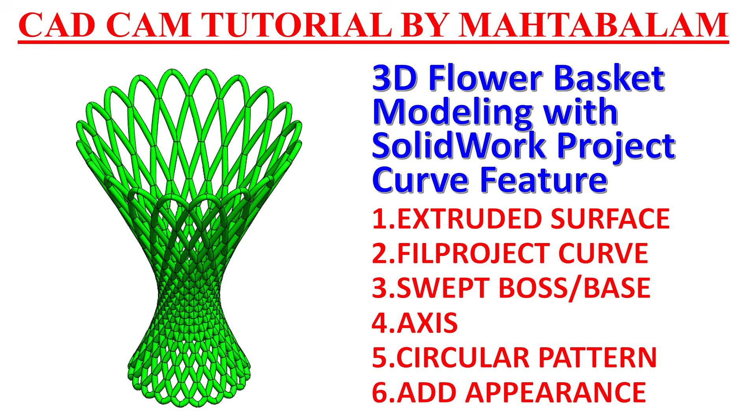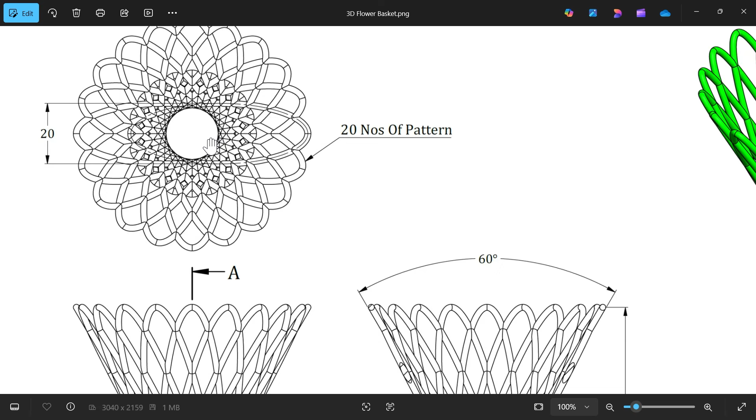Let's make a 3D flower basket in SolidWorks with the help of the project curve feature. Now you will see this is a front view, this is a section view, and there is one top view. In the top view you will see this is the outer side, and there is an inner side also visible. Now you will see there are 20 patterns. You will see this one pattern is highlighted here.

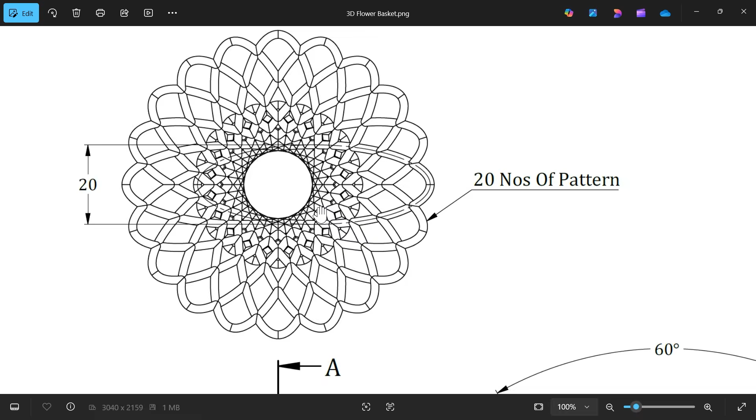This is a kind of ellipse. The width is 20 millimeter. See, this starts from the top and goes to the bottom. You will see one construction line. Okay. Now if we see the side view, the total length is 100 millimeter and the bottom diameter is 40 millimeter.

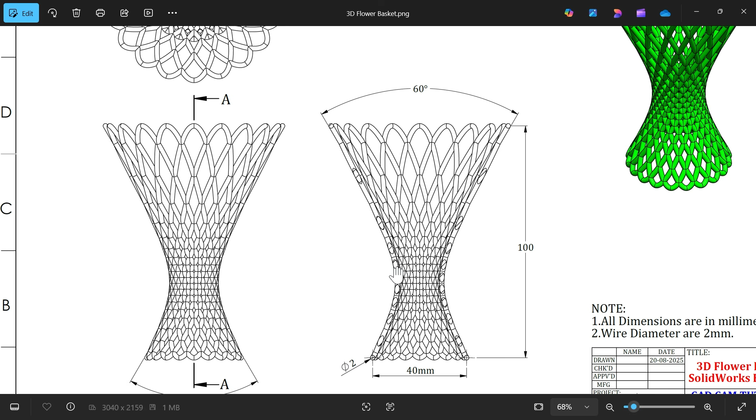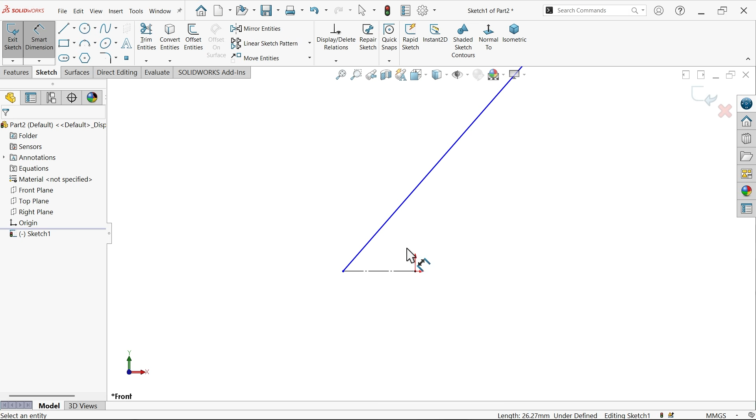Front plane, sketch. First I am going to create one surface. Let me select line from here to here to here. Make this one a construction line. Okay. Smart dimension, total length 100 millimeter. Okay.

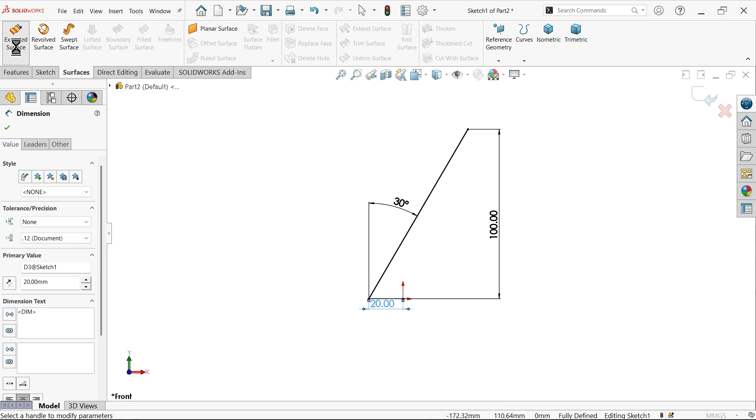Now angle, select this point. Select this one, 30 degree. 60 divided by 2, it's going to be 30 degree. Now distance from here to here, 40 divided by 2, 20. Now go to surface and select extruded surface. Keep mid plane and make it, let's say, 60, more than the depth of 20 millimeter. Okay.

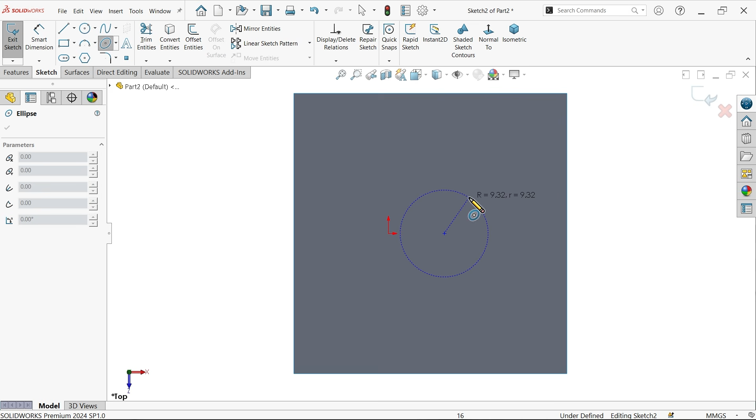Now let me select top plane, sketch. Now let's draw this ellipse. Don't make it center, just draw somewhere here. Exit. Now let me add one relation. Select these two, horizontal. For proper visibility you can connect it. That's it. Now select these 3 points and make one constraint, horizontal.

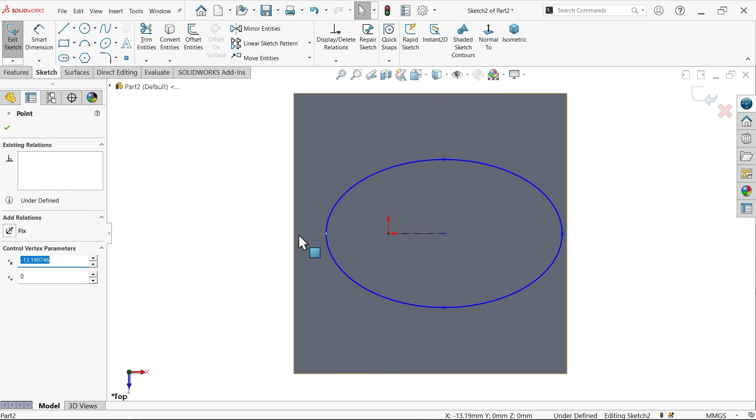Select this point to this, coincident. Similarly this end, point to this, coincident, because our ellipse is under defined. Now the dimension given is 20 millimeter. This one. Okay. Isometric view. Now see, this is the plane and this is our geometry.

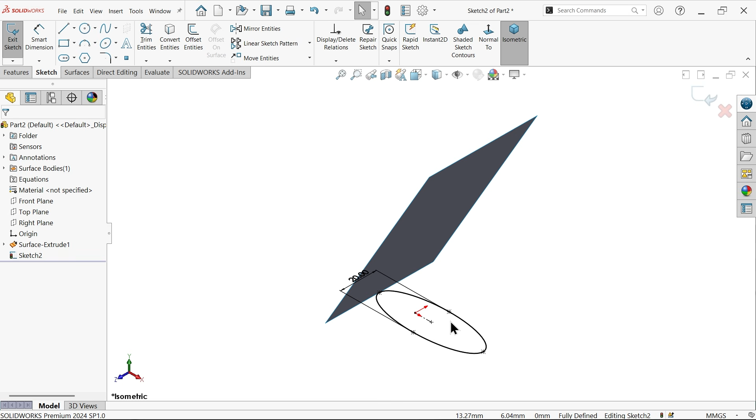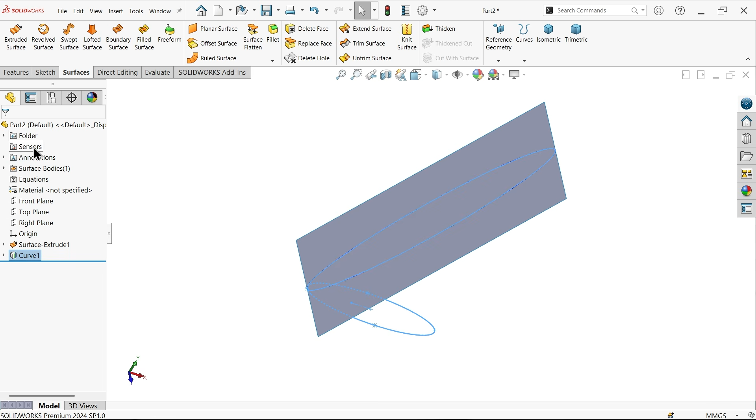Now exit. Now drop down curve and choose project curve. I want to project this curve on this surface. So here the projection type is sketch on face. This is the sketch, and here you have to select the surface. Let me select this. You will see the preview. Okay. Now simply right click and hide this.

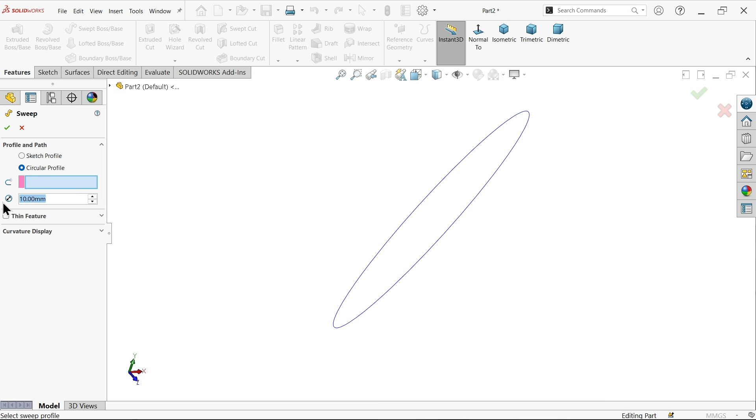See, the wire diameter is 2 millimeter. Simply go to features, activate swept boss base. Now here profile and path: choose circular profile, make it diameter 2, and here let me select this project curve, and you will see. Simple, say okay. Okay, let me add color.

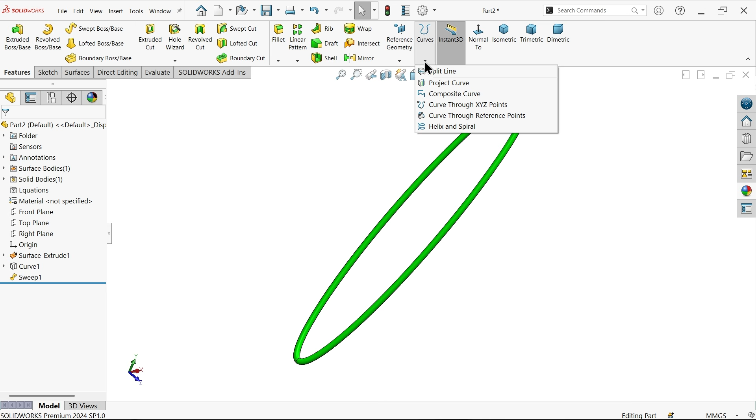Okay, now select and hide this curve. Now we have one ellipse, one body. Now I am going to create one axis for the circular pattern. So drop down reference geometry, axis. Here I am going to select front plane and right plane, 2 planes, isometric view. Now you will see. Okay. Now we will rotate this one along this axis.

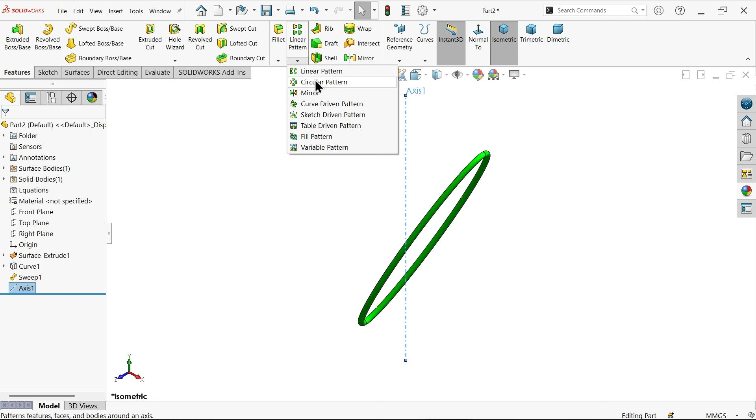Circular pattern. The axis is already selected. Equal spacing, 360, and we need 20 patterns. Let me select this. Now you will see the preview. It's clear. Say okay. Let me hide this axis. Click on axis and hide. This is how we make a good looking 3D basket with the help of the simple project curve feature.